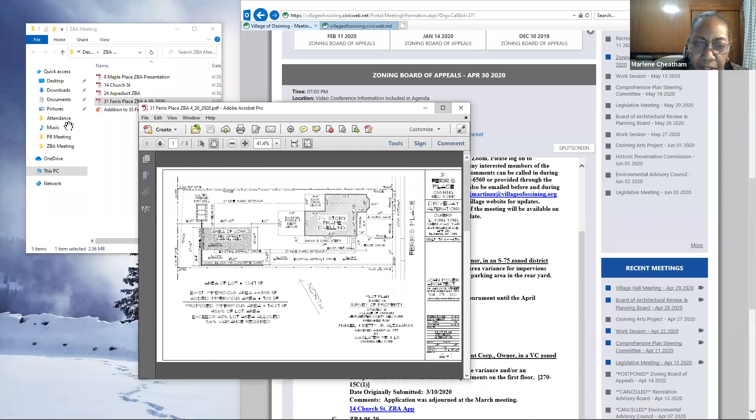Okay. Is there anyone else online to speak to this application? Is there anyone on the board that would like to speak to this application? All right, if there's no discussion, are we in favor of going forward with this at this time? Marlene, if you want to close the public hearing then. Wait, no. There are people that have raised their hands. Okay. Oh, I'm sorry. I think they're on 35. This is 31. Right, there are people on 31. They have a raised hand. We have to at least allow them the opportunity. Sure.

So, Mr. Codman, you're on. Hello? Can you hear me? Codman, you raised your hand? Yes, I did. Are you here for 31 or 35 Ferris Place? Well, I'd like to speak about that too. I didn't get the notice for this particular public hearing, so I wanted to be able to speak to it because one of the neighbors had brought this to my attention. You need to state your name first though. Oh, sure. My name is John Codman. I live at 37 Ferris Place.

So one of the neighbors had spoken to me about this and had expressed some concern because I believe the asphalting had been done without a proper permit. Is that correct? Yes, that's correct. That's what brought them here to the zoning board. They received a violation for installing the driveway without a permit. Right. Okay. My concern is the way the topography is on the properties, it slopes down, and there is concern by one of the neighbors that some of the runoff would go onto his property.

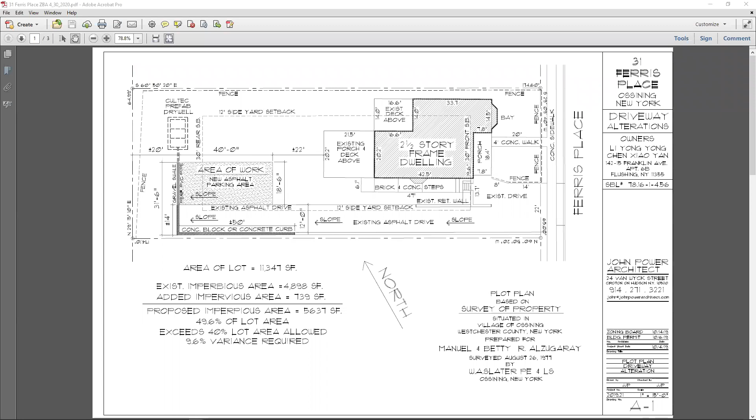John Power again, I would recommend that the client remove the asphalt and put a pervious paver in lieu of the curb and the drainage system. I think it would be more cost effective, and that's my suggestion. So is that a question for, is it Cece? Yes, hi, this is Cece. So if we move ahead with John's suggestion, do we have to submit more paperwork, or how does that work?

I would believe, and Amanda, correct me on this, if you go ahead with John's suggestion to take up the asphalt material and put down something that falls within the guidelines of the zoning ordinance, you do not need to have anything by this board. You are pretty much done with it. Right. You would withdraw this application and then just coordinate with the building department as to any sort of paperwork that they would require. But Joe, what would you need, if anything?

Correct. They would withdraw their application to the zoning board, and then John Power would just submit a revised plan to our department showing pervious pavers and correcting the impervious surface coverage to show that it's under 40%. And then we would just move forward with the building department only. Okay. This is Cece. So I would have to talk to my parents, who are the owners, but I think that's probably the way we're going to go.

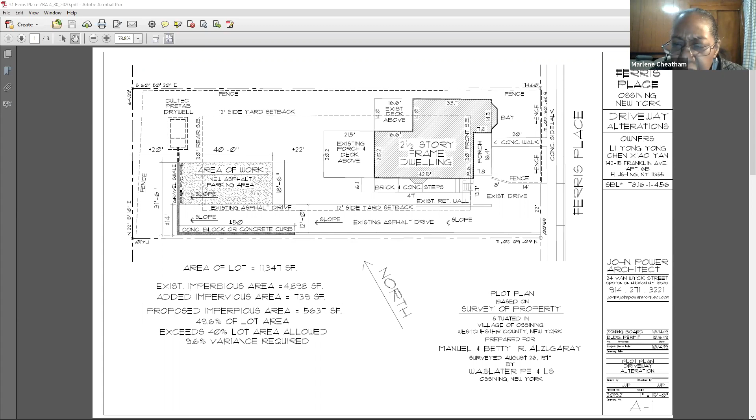The next on the agenda was ZBA 0420, which is 14 Church Street. I understand that is adjourned. Yeah, Jamie and I received correspondence from the applicant's attorney, Wayne Spector, indicating that they are adjourning the application tonight. Do we know when? Let me check. I believe that he said that he didn't think he'd be able to get the materials necessary in for the May 12th meeting, so I think we'll be seeing them in June. Yeah, okay.

Jamie, is that right? Did we lose Jamie? No, we didn't. And she's muted. Oh. I believe so, yes. I believe that's what he said. Thanks.

Okay, so next on our agenda is ZBA 0620, 24 Aqueduct Street. And I believe that applicant also asked for an adjournment. That's at 24 Aqueduct. Yes, they requested an adjournment till the May meeting. Okay. So now we're up to ZBA 0720, 8 Maple Place. I believe that applicant also asked for an adjournment to the May meeting.

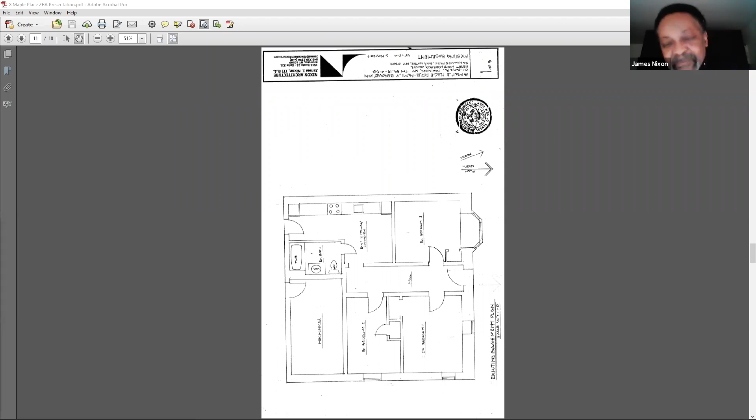And sometime a little over a year ago, it came to the attention of the building department that the CO is for 4 units. There are 2 units on the first floor, 2 units on the second floor, and the basement is a 5th unit. We believe that some previous owner finished the basement at some point, making a larger apartment. So our proposal here, if we could flip through the slides, the drawings are toward the end. The first drawing is the basement existing condition. The right side of the sheet faces the street. When my client took over the building, that was being used as an apartment with 3 bedrooms. So now we want to legalize by getting rid of the 5th unit, going to a 4-unit property, as permitted by the certificate of occupancy.

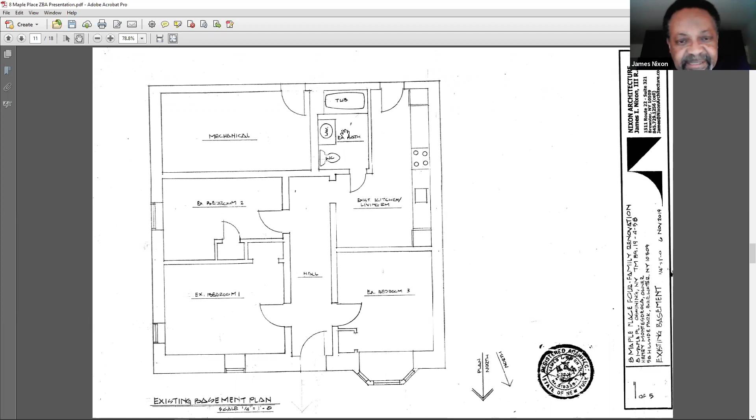So what we are proposing is to turn the basement space into the lower level of a duplex unit with one of the first floor units. We'll have an interior stair, and that tenant will have a portion of the first floor plus all of this basement area that is available for tenants. As you may see in the upper left-hand corner, part of that is mechanical space not available to a tenant. If we go to the next slide, you can see the first floor plan as proposed. No, I'm sorry, that's the basement plan as proposed. We should look at that.

In the upper right corner, we're adding a stair to go up to the first floor. We rearrange the space so we don't need all those little rooms basically. So we're getting two good size bedrooms that will be a part of the unit upstairs. We've eliminated the kitchen. The existing kitchen was where I'm showing a new stair. The bathroom is existing, that will remain.

If we go to the next slide, you'll see the first floor plan as proposed. Good. Yes, okay. Again, the stairs in the upper right-hand corner. So from this level, it goes down to the basement level, and the kitchen stays in the same place. It's approximately in the middle of that rather narrow unit, and the existing bedroom, which is at the front of the building, stays the same. The main change there is that the area that's now being taken in this drawing, mostly by the stair, is what's currently the living room.

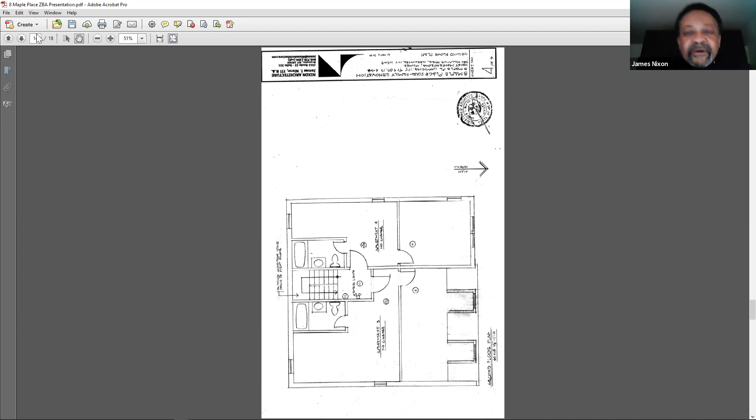So overall, the building will go from its existing condition of having 5 units, which is not permitted, and we concede that, to go back to the 4 units, which is pre-existing non-conforming since, as I said, 1948. And, as I said, 1 unit gets larger, considerably larger. I would like to point out that all of these units are small. All of the units as they exist, except for the basement level, have less than 500 square feet. According to the current zoning ordinance, units should be not less than 800 square feet.

So in this regard, the unit where we're making changes becomes more conforming, in that we'll be up to about 1,100 square feet. But as Mr. Agostinelli pointed out to us, the zoning ordinance states that pre-existing nonconformity cannot be expanded by more than 10%. And we are expanding it considerably. That 1 unit would go from about 400 and something square feet to about 1,100 square feet between the 2 floors.

In my cover letter, I misstated exactly the numbers. I said it's an increase of 306%. It's a total of 306%. It's an increase of 206%. But nonetheless, it's considerably more than the permitted 10% increase. So that is what, therefore, brought us to the zoning board. Are there any questions at this time? Are there any questions from the board? Kevin?

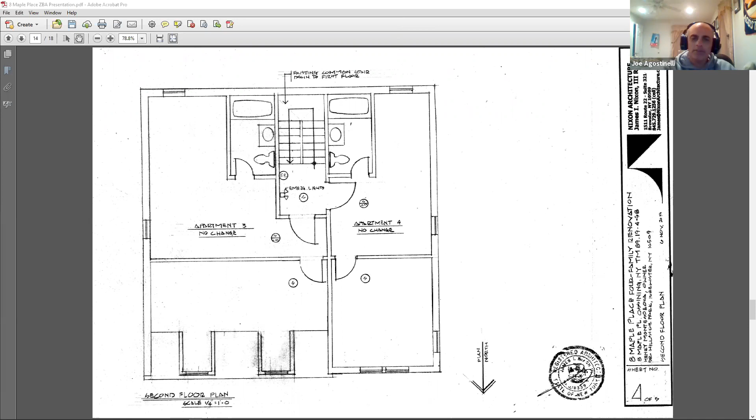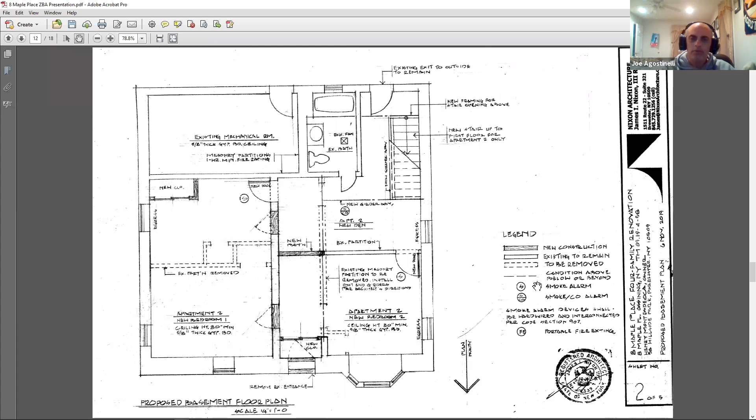I just wanted to check something on that plan. Can you go back to the basement proposed? Right there. So if this unit is being combined with the upstairs unit, where is the kitchen? The kitchen is upstairs. Yes, the apartment 2 existing kitchen. It's right here below on the right side. No. But that says apartment 1. Oh. Right, apartment 2 is on the right.

Right, existing kitchen. I guess the issue is the staircase is taking that place. So I'm trying to see where is the actual kitchen itself. The kitchen is in that area. It's in the middle of the apartment. The area towards the back, I think it's a little odd, but that's the way it is, is what's being used as a living room. So that's what we're losing by putting in that stair.

On the first floor apartment or the apartment above it. Right. So I guess my question is that because the dwelling unit, by the state code regulation, you have to have some type of either living room or dining room area. And if the kitchen is going in the area where it's been circled in green, and then there's I guess a bedroom here in the front, a bathroom, the staircase, then you go downstairs and you have additional bathrooms. There's no living room in this apartment.

Yeah. Well, there's the converted living room, apartment 2, existing bedroom. It says converted to living room right here. Oh, that's in the basement? No, on the first floor. Oh, I see. Okay. I'm sorry, I forgot to point that out. Okay, I see. Because now the 2 bedrooms are down. There'll be 2 bedrooms downstairs. Okay, so this level would have the kitchen, the bathroom, a staircase, and a living room, and the bedroom downstairs. Okay, understood.

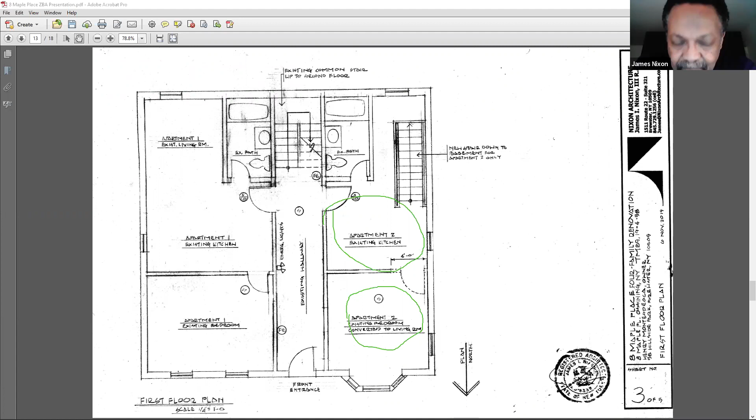Should I go to number 5? Number 5, yep. Okay. Whether the alleged difficulty was self-created, which is not determinative in the case of an area variance. Yeah. So it doesn't really matter then, does it? And the guy who owns it, he bought it. It came that way. So it does matter. It does matter. It's non-determinative, as Amanda mentioned.

So in this instance, I think that you can make a determination that if it was their own doing, which it might be, it doesn't mean that it's determinative. Right. It's just another factor to be balanced with the other 4 factors. Okay.

If there's no other information that we need, Amanda, I'd like to make a motion to open the public hearing if there's anyone here to speak on this matter. We do have a person calling in on the phone, and I'm not sure if that person is interested in speaking. So I'm going to allow them to talk real briefly. Can we have a first and a second? Oh, I apologize. Motion to open the public hearing. And seconded. Okay, that was Kevin that motioned and Bob that seconded.

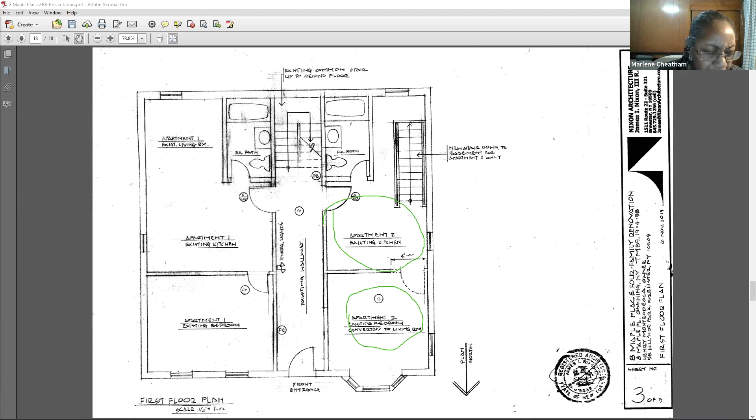Okay, 35 Ferris Place, ZBA 1120. I know there are a number of people who were on for this application, so I'm going to start moving people over now. I am going to start with Susan Riordan. We have people that have raised their hand already for the public hearing. So for those people listening, keep your hand raised. We will call on you when the public hearing gets open. Susan, can you unmute yourself?

Hello. All right. Do you have anybody else from your team here? Just the owner. The homeowner. The homeowner? Okay. And A.R. Swan? Yeah, no, he's a neighbor. Linda's a neighbor, and John Codman's a neighbor. Great. And I'm the homeowner. And Mark Fry? Oh, I know him, but I don't know what he's for. All right. Let me open it up. Marlene, give me 2 seconds.

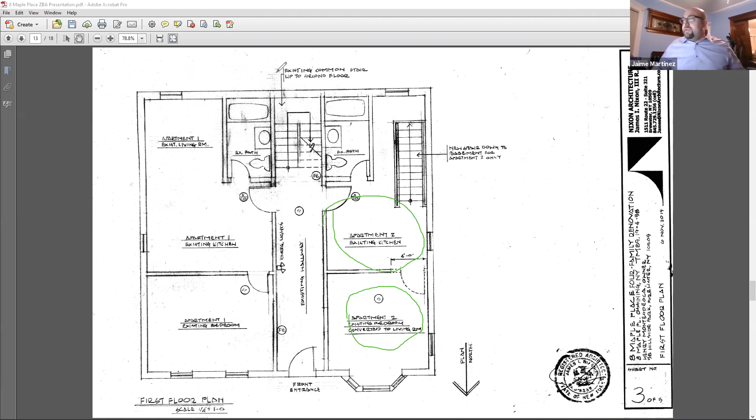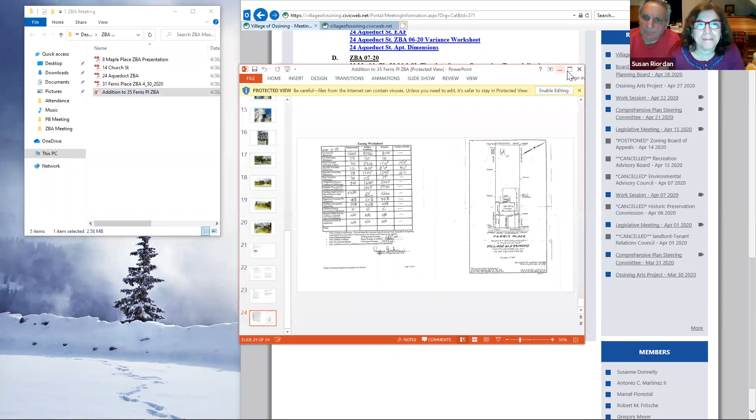Hi, Marlene. Hi, Miss Riordan. How are you? Nice to see you. You and Mr. Andriucci, Eugene, are here about 35 Ferris Place? Yep. And I see you're seeking an area variance? Yes. Okay, so get the drawings up. What are you looking for?

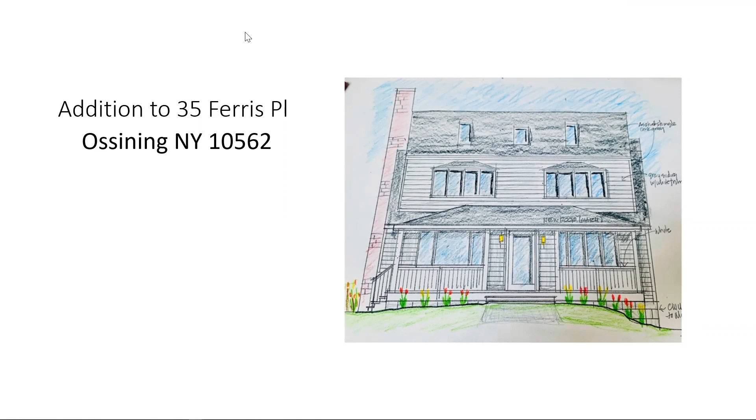Ooh, nice drawings. As a reminder, I just wanted to let the board know that this application was approved, not at the planning board, the BAR application was approved. Right, thanks. Okay, going to the next slide, which is the site plan, would explain what the issues are. So as you can see, it's an S75 zone, but the lot is only 50 feet wide, which is typical of a lot of lots on Ferris Place.

Right now, there's a house on it. We'd like to add a front porch. We're the only house all around us that doesn't have a front porch. And in the back, we want to add a sunroom, an elevator, because I'm in a wheelchair, and stairs, and then a deck in the back, which would also double as a carport. So we're looking for front yard, because 30 feet is the front yard. The house is only at 25. The front porch would make it 17, which is typical of this neighborhood.

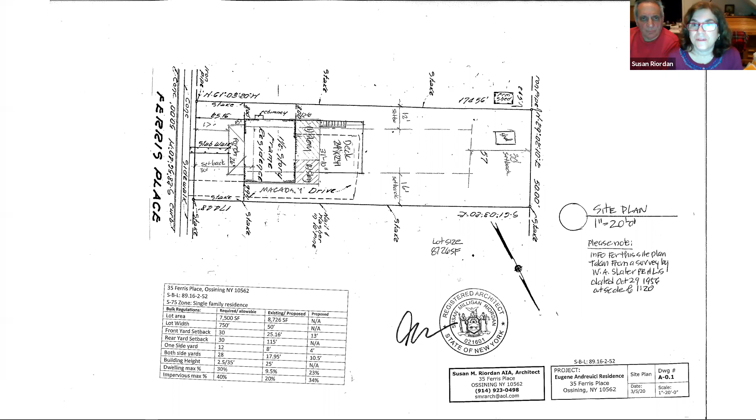And then in the back, we're adding on, but we're staying within the lines of the house. So whatever we would need on the side would be the same. As you can see from the zoning chart, one side we need 4, for 2 sides we need 10.5. And if you want to see what it looks like, you can go to the front side. Oh yeah, these are the plans: front, side, rear, side.

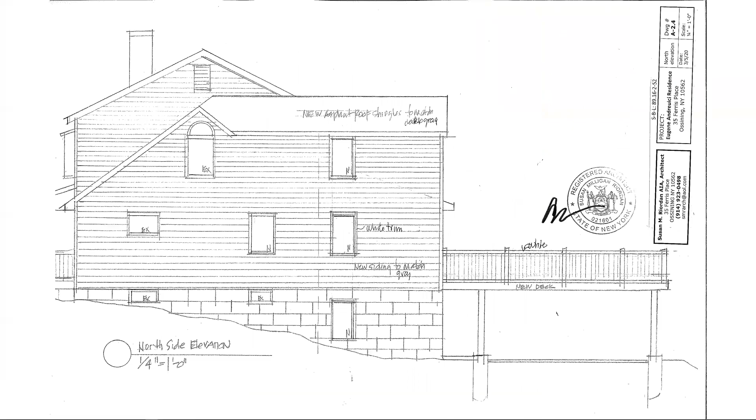So how far out would the porch come? Because I thought I saw a big tree in the middle, so that's why I was wondering. Oh yeah, no, it won't go that far. We measured the porches on either side of us and they're 8 feet. So we thought that that would be a good way to come out. That way, if there's furniture and I have to get around with my wheelchair, I could do it. Okay.

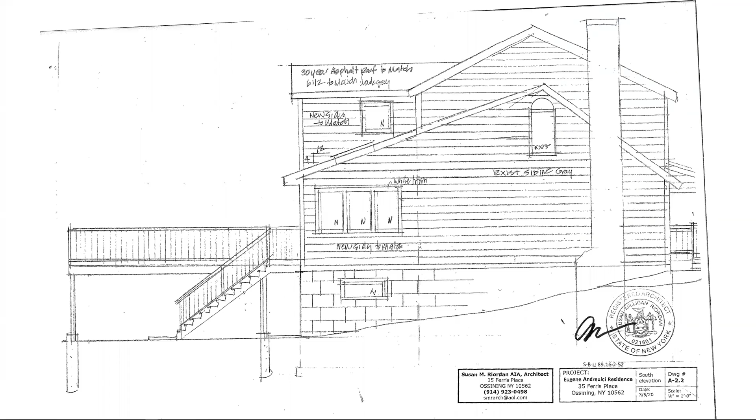Okay, thank you. Are there any questions from the board? George? No, no questions. Kevin? I have no questions. Bob? No questions.

Can I get a motion, please, to open the public hearing? So moved, Bob Daraio. Seconded, Kevin Griffith. Can I get a roll call vote? Marlene? Yes. Kevin? Aye. Oh, sorry, that was yes. Kevin said yes. Bob? Yes. George? Yes. Okay, 4-0, the hearing is open.

All right, I know there's a number of people who want to speak regarding this application. We have Linda Griffin, John Codman, A.R. Swan. All three have their hands raised. So I will call them in the order that, I guess Linda Griffin is the first hand up, I believe. Okay, so Linda Griffin first, John Codman, and A.R. Swan in that order. Okay. Hello. Linda, you're able to talk now.

Okay, great. I'm Linda Griffin. I'm at 33 Ferris Place. I'm their immediate neighbor, and I fully support the variances that they're seeking. And I just hope it will be approved as quickly as possible. They're the best neighbors anybody can have. That's it. Thank you, Ms. Griffin. Thank you.

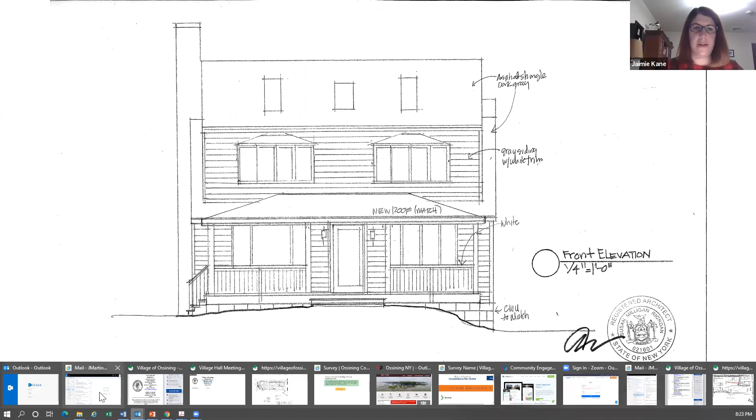Not yet, no. Okay. All right. I have no correspondence from today or from during this meeting. So may I have a motion from the board to close the public hearing? Motion to close.

Was that Kevin? Kevin? What? Was that you? No, it was George. Okay, okay. You have to remember to say your name because we can't see you. Oh, George Bailing, motion to close. Okay.

Can I get a second? Kevin Griffith, seconding. Roll call vote. All right, Marlene? Aye. Kevin? Aye. Bob? Aye. George? Aye. All right, 4-0. Thank you.

I'd like to make a motion. Can I? Would you like me to go through the 5 factors? Oh, 5 factors. I'm sorry. I forgot the 5. Yeah. I apologize. That's okay. All right, let's go through the 5 factors.

Whether an undesirable change will be produced in the character of the neighborhood or a detriment to nearby properties will be created by the granting of the area variance. I don't see it. I don't see it either. Bob doesn't think so either.

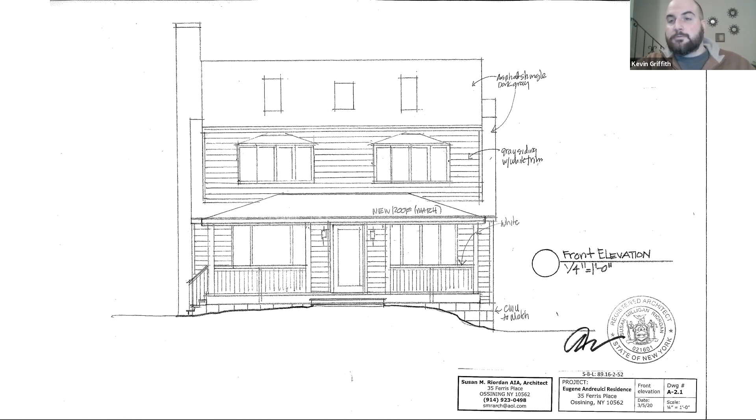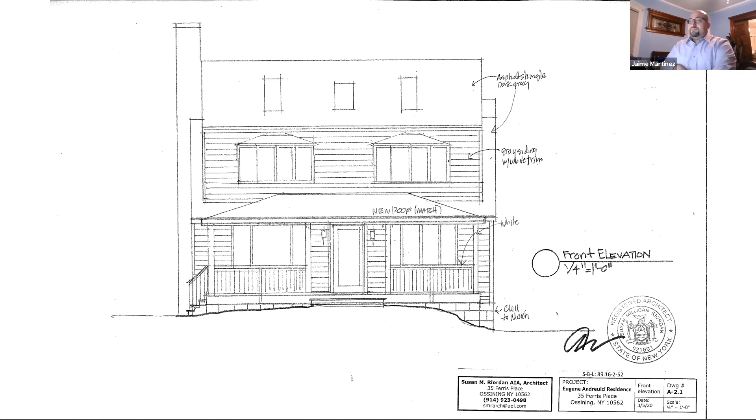I mean, I think the only argument could be, do they need a front porch? But I believe with the changes going on with the rest of the house, I would go ahead with what they are looking for. Yeah, well, part of the benefit that they're seeking, I guess, is the benefit of that front porch, right? Right. Mm-hmm. So.

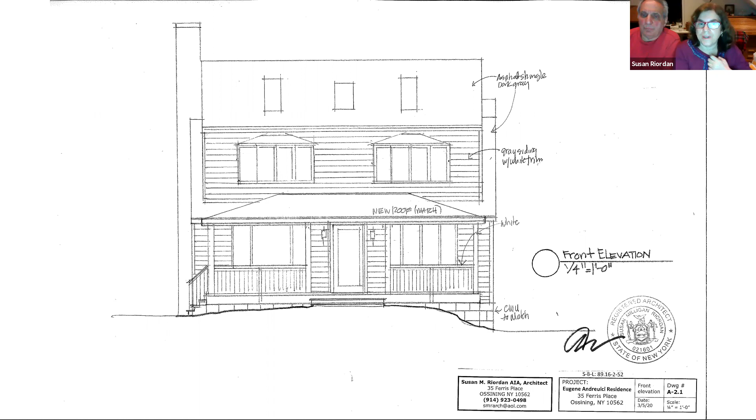Next one. Whether the requested area variances are substantial. I'm going to ask Ms. Riordan, do you know what the overall increase is in the area variance for the total project? Well, the front yard was 25 and now it'll be 13. I mean, for the house itself. The square footage. Oh, the square footage, yeah. I think that's on one of the charts.

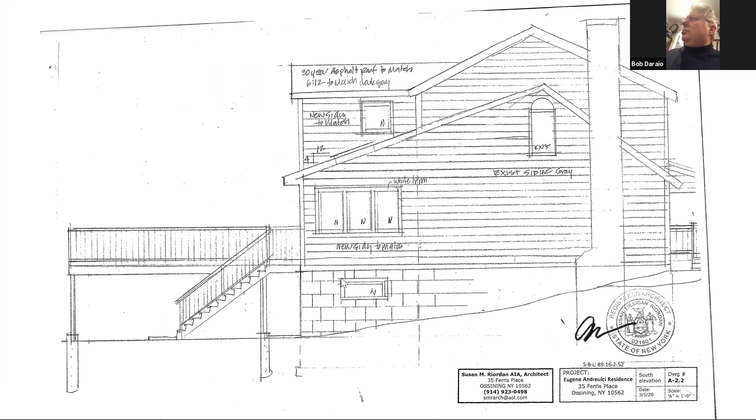So. Oh, yeah. So we're going from, oh, I guess we're adding 580 square feet. Okay. Including the elevator and stairs. Including elevator. The elevator and the stairs, okay. Yeah. With the new addition, okay. I think the benefits of doing this certainly are worth the extra area that it will take to accomplish it. Bob Daraio. Thank you.

Yes. I agree with it, George. George, okay. Joe, is there anything you'd like to add to that? No, I think it's pretty straightforward. I have no questions about it. Okay. Next. Whether the proposed variances will have an adverse effect or impact on the physical or environmental conditions in the neighborhood or district.

And I believe by the neighbors and the people around, the answer to that would be no. They actually are welcoming the porch and the changes to the property. Okay. I agree with Marlene, Bob Daraio. I agree, George. Kevin Griffith, I agree. Okay. And lastly, whether the difficulty was self-created.

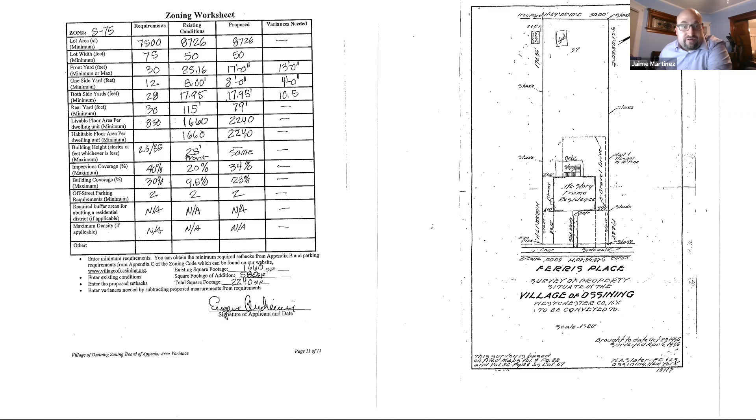keep in mind that the variance that's being requested here that is different from the existing conditions is mostly to the front yard. Right. The existing conditions are not changing for the variances being requested for the side yards. Right. So it's the front. Oh, go ahead, Marlene. Sorry. No, go ahead, Kevin.

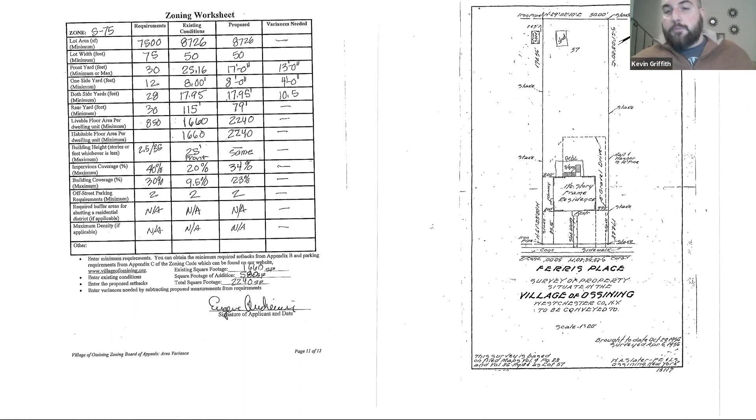I was going to say, I think the situation regarding factors 1 through 4 outweighs whatever self-difficulty would have been created anyway. Yes. That's what I was saying. George, do you have anything to add? No, they've said what I think. Okay. In other words, I agree with them. Okay, so we have gone through the 5 factors.

Can we make a motion to accept this area variance or deny the request? Yes. Motion to grant the request. Bob Daraio. Do I have a second? I'll second the motion to grant the request. Okay. And that was George? Sure. Yes. Yeah, I'll give it to George.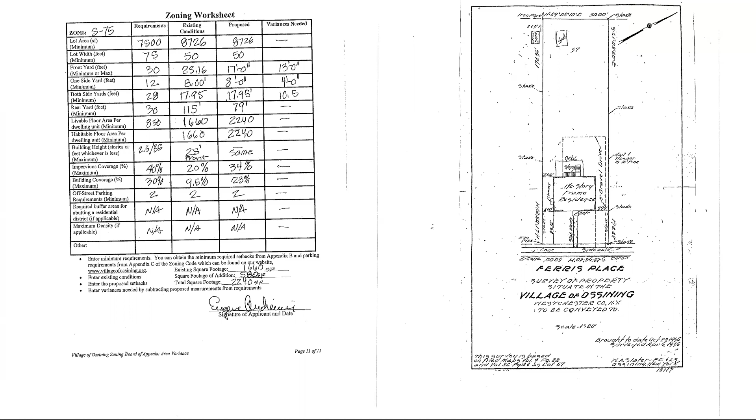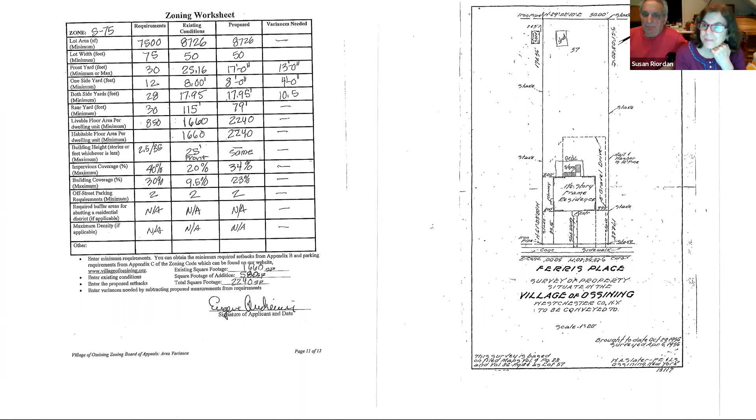Can I have a roll call vote? Sure. Marlene? Aye. Kevin? Aye. Bob? Aye. George? Aye. All right, so that carries 4-0. Thank you. Okay, motion carried. Thank you, Ms. Riordan. Enjoy your building. Thank you all. Stop by and see it when it's done.

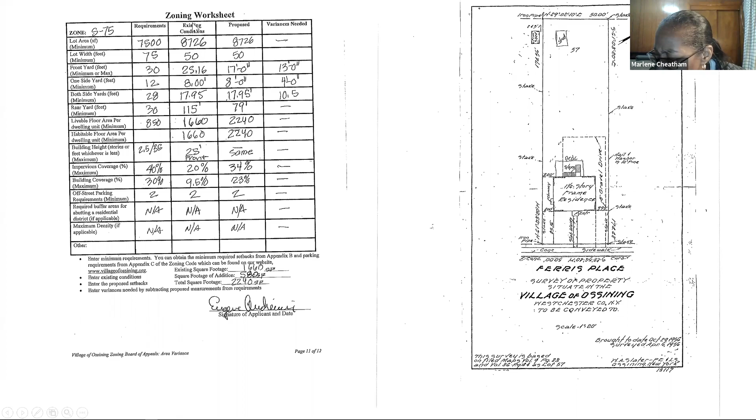Okay. That concludes the agenda for tonight. One additional thing, we just need to approve the minutes from the March 10th, 2020 meeting. Can I get a motion to approve those minutes? Motion to approve the meeting minutes of March 10th, 2020. Can I get a second? Second, Bob Daraio.

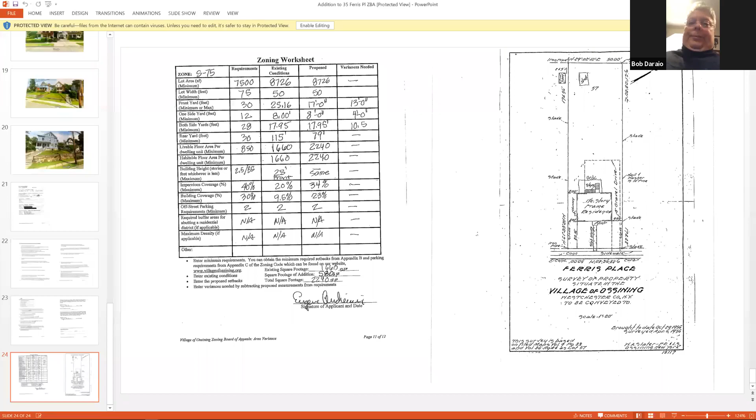Do I need a roll call vote? Yes, if you want to. Okay. Roll call vote. Marlene? Aye. Kevin? Aye. Bob? Aye. George? Aye. All right, 4-0. Okay. Can I get a motion to adjourn? I believe we are done. Amanda, is there anything else? Joe, Kevin, Bob, George? There's nothing else on the agenda.

I just wanted to let everybody know that we're going to start having any applicants who provide supplemental submittals to the board, so not for a primary submission, which is just main application materials, but supplemental submissions, give you guys a cover letter that kind of explains what they're addressing. Okay. Good idea. Yeah. So that's great. I love that. Yeah. So I think it's been done in the past, and maybe it hasn't been in play for a while, but just wanted to let you know.

I think it would be helpful now that we're not physically getting material, it would help us because we really need to see more. It was a little different when we were getting a packet every month, but now that we're having to read everything on our computers and look at drawings upside down and inside out, any little piece of information would help. Okay, great.